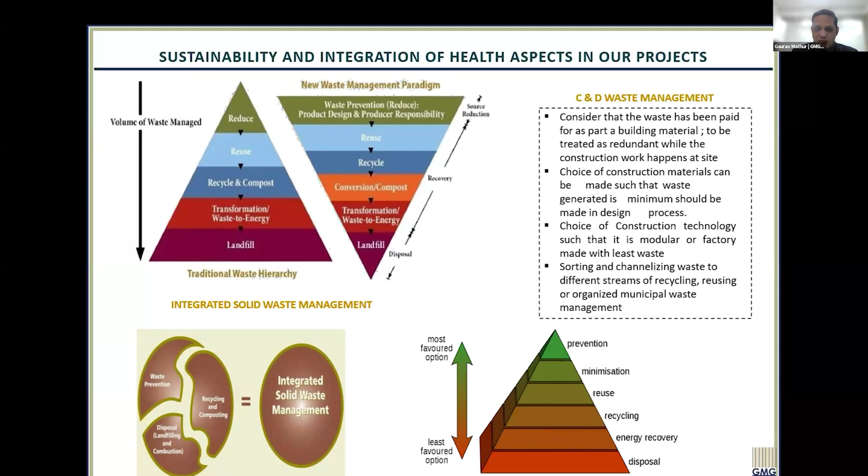The kind of waste management techniques that we can adopt, precast, prefabricated, and a lot of other techniques to reduce waste, do things with precision, and reuse, recycle. All these things are very important.

We do wind simulations also. This helps us in identifying how natural elements like wind can really cool down the building. And of course, the shape of the building is also something that is an outcome of this analysis.

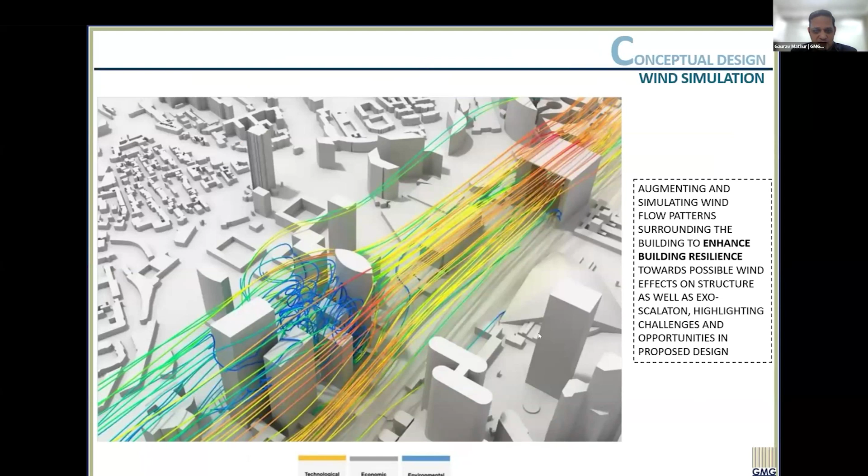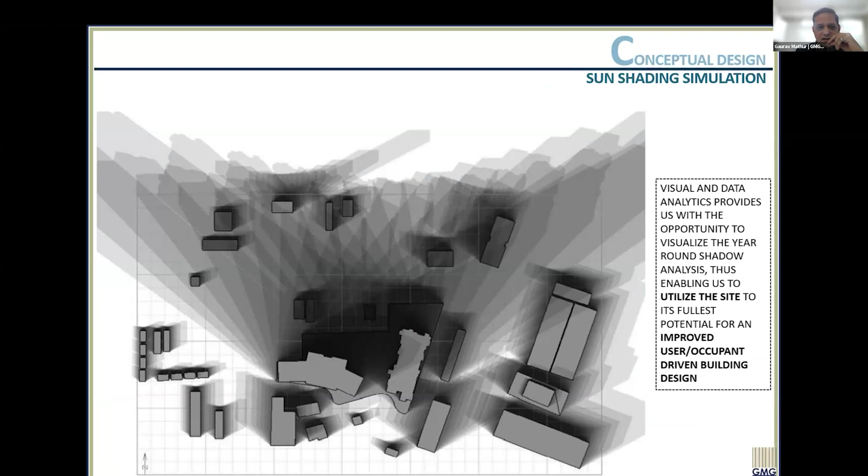Next is about the shadow analysis. These are also studies which are conducted, and this plays a lot of role not only in your own building, but the surrounding buildings also play a major role in the amount of heat that you'll be gathering in your building. So that is something which we take care of.

I will just move forward. What we want to also focus upon is not only the utility bills that we are talking about. As we are talking about a human-centric approach, any business, let's say a hospital or any building, the major portion of its expenditure is in salaries, or let's say the experience that a patient undergoes in case of hospitals, and the kind of experience that they have, that has a major cost to the healthcare project or the property. And the rest of the things are other parts which fill in the whole pie. So here we should also focus on how a human experience is there.

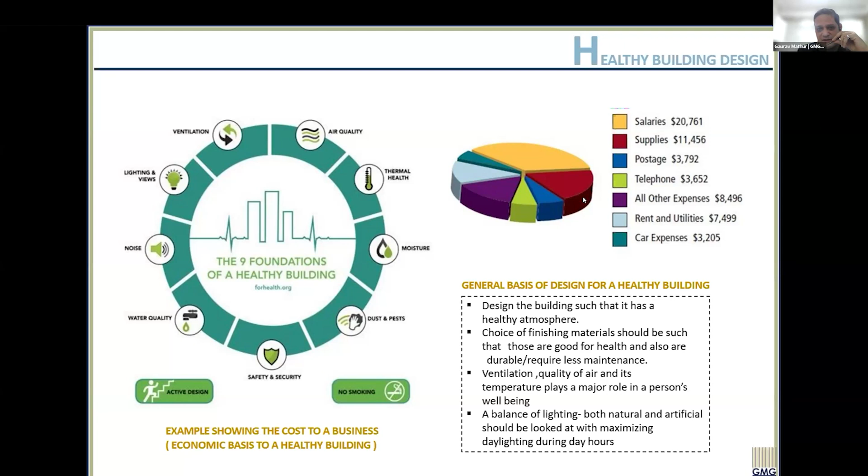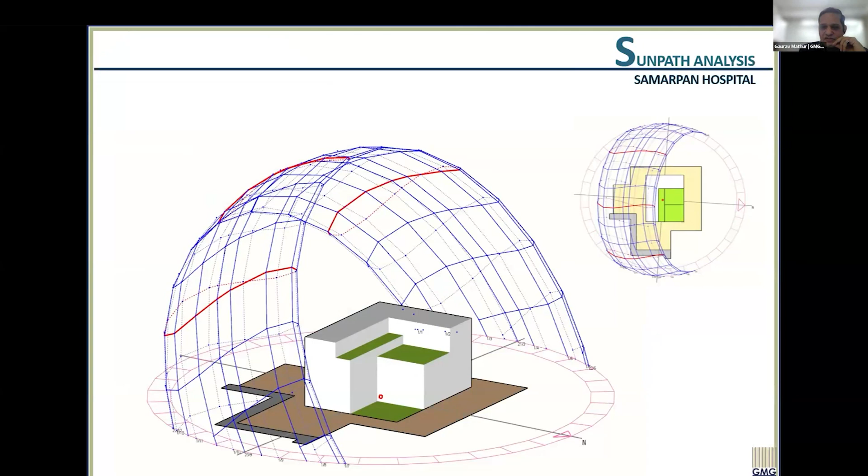So yes, we discuss things holistically about the climate and things on a larger scale. That is, of course, being taken care of with a lot of energy efficiency modeling, and a lot of experts are involved in these things. So different orientations first, then we have different material usage as a second step.

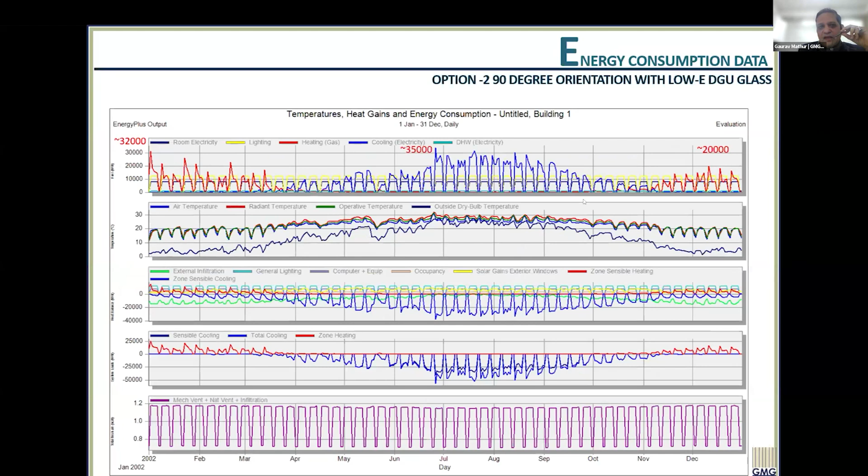And subsequently, we also discuss the amount of daylighting that should be there in a building. There's a right balance of heat intake versus natural light that is minimum required in a hospital. The correct window to wall ratio is something we have to always arrive at, because sufficiency of natural light is very important in healthcare projects. Natural light is known to be very therapeutic for human recovery in case of illness. So this is a challenge, and that's where we strike a balance between heat intake and the amount of natural light that should come into healthcare spaces.

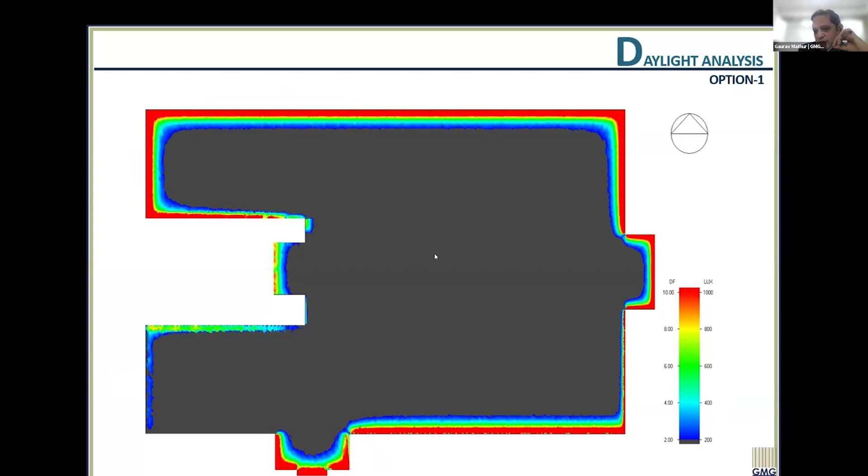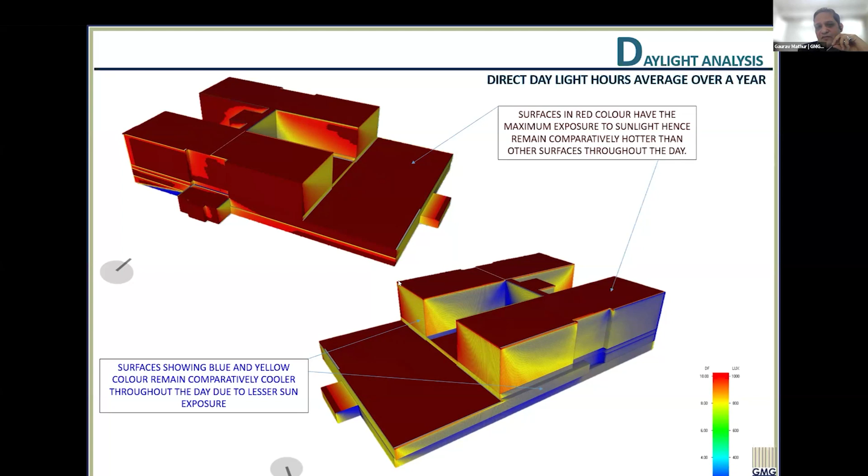By the correct proportion of window to wall ratio is where we strike this balance. As you can see here, these softwares guide us as to how the whole envelope is subject to either extra heat, or some faces not facing that much heat and are cold, or the amount of daylighting which is there, or very little daylighting. So these softwares help us in informing the design and taking decisions on how things should be.

So these are some hospitality projects also that we had modeled and reviewed. These are more of hotel projects. These kind of studies are also conducted by us, and the shadow analysis, the amount of natural light that will be coming around in the building. In different seasons, we can evaluate how much light is there in each of these areas, and that informs the amount of heat, or the amount of light that we want to have. So the role of an architect is to strike a balance between both, and we have to take a judicious call in these aspects.

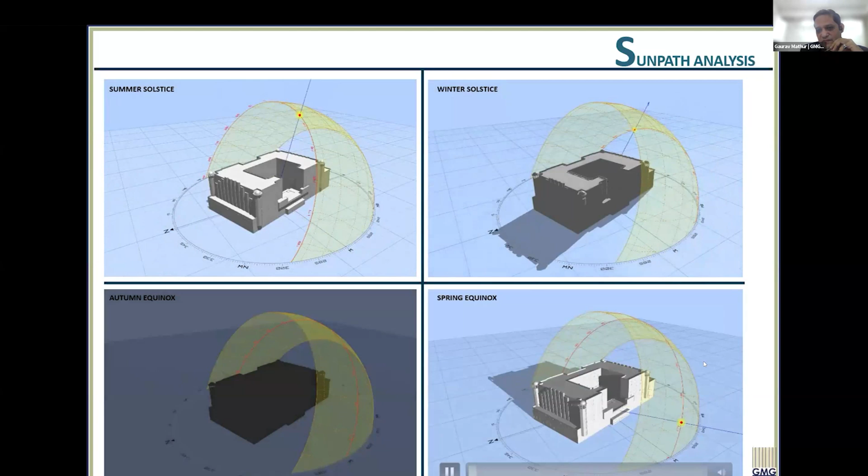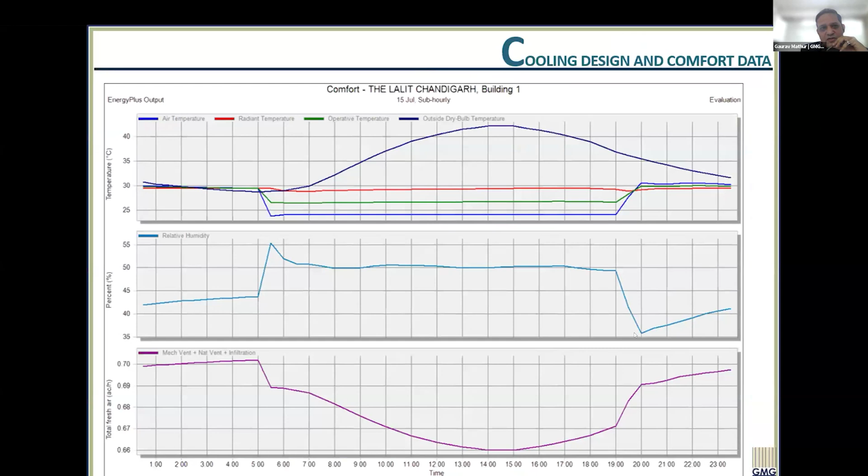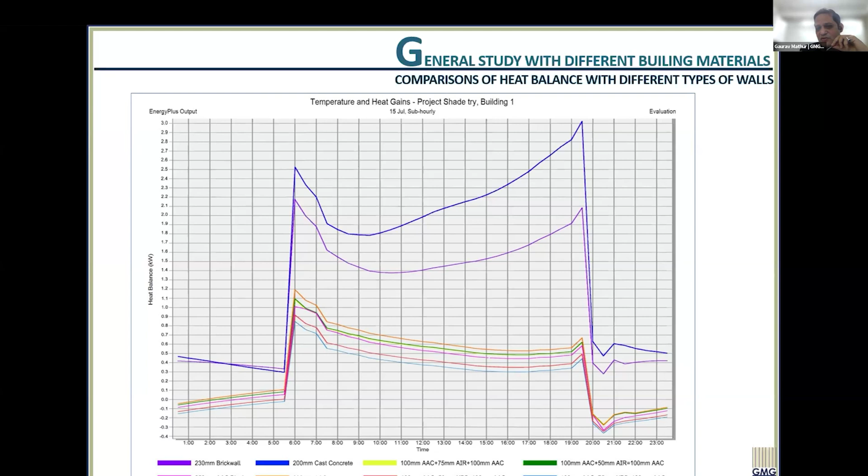There are housing projects across everywhere being built in Mivan construction or any other concrete construction. So you can see the amount of heat that will come inside the building. These have very high thermal capacity, so they are going to absorb a lot of heat. So you have to choose for your own project as to which material I should use.

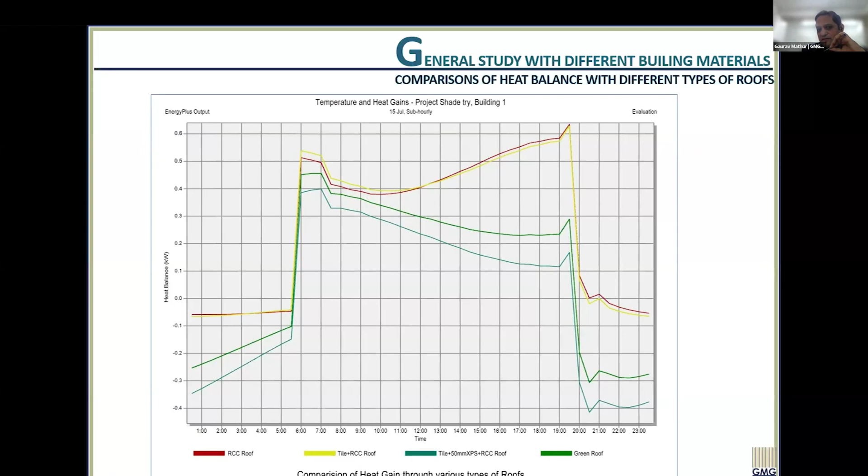So my whole presentation here is oriented towards sensitizing ourselves towards the level of impact that could be there with each of these components, each of these stepwise parameters that are there to design a building. A lot of these energy factors and water factors are taken care of, and these benefit the owners at a big level. But when it comes to the users, and ultimately the likability of the space and the likability of the hospital and people coming back to get treated over there, these are the aspects which are supposed to be done properly, and really impact the mental well-being and the mindfulness of design.

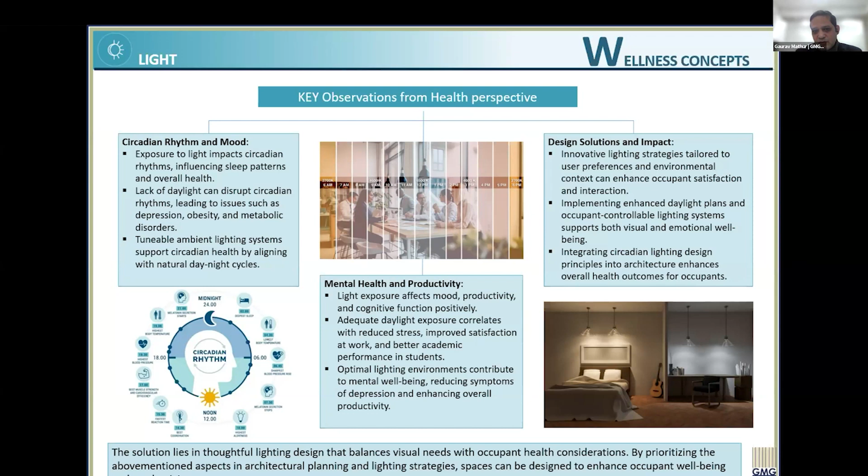So we particularly focus on these aspects, and there are various parameters that most of the experts know about: the light effects, the sound effects, and the air quality, and everything. So in hospitals, these should be of high priority. We are focusing on the occupant health in these cases. So this is the crux of the matter. I would like to finish the topic here. Thank you.